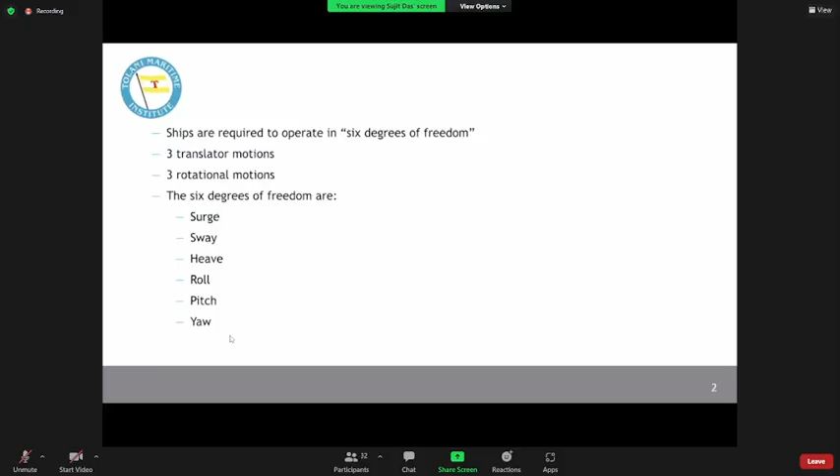Okay. Now let's understand this. The ship can possibly jump up and down in water. Am I right? Yes, sir. So that is what we call heaving. Okay. Similarly, let's not use pink, let's use blue. Similarly, we have another motion. This is also a translatory motion. Please understand these are along the axis. Translatory motions are the motions which happen along the axis, not about the axis.

So previously what we were seeing here, this is a translatory motion along the z-axis. That means the ship is jumping up and down kind of. And here the ship is having a motion along the x-axis that we call surge. So many times you will see people say the ship is surging ahead instead of saying the ship is moving ahead. That is because this degree of motion of the ship, along the length of the ship, is called surging.

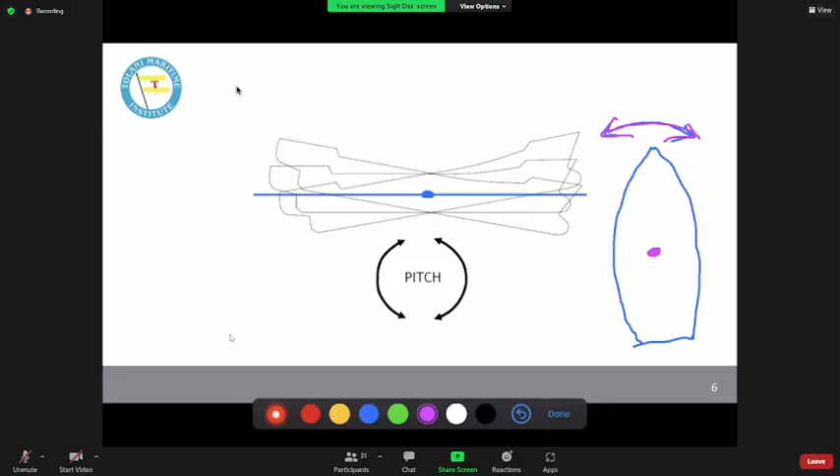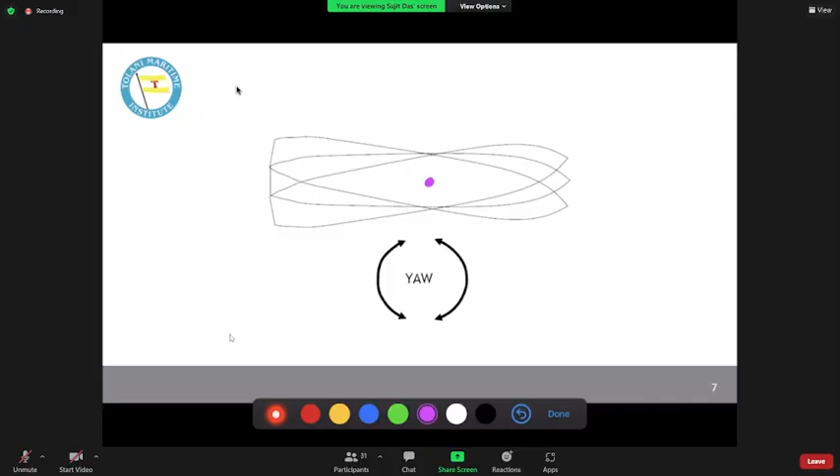Similarly, this is yaw. This is the motion about the z-axis which passes through this. This is the plan view of the ship. And finally we have the roll. This term you must have heard, come across, most widely used. Now, rolling is about which axis? Tell me. X. Yes, very good. This is the x-axis, the length of the ship. When it is happening about that, we call it rolling.

These are the three rotational degrees of motion, and earlier what we saw were the three translatory degrees of motion. Why we learned about this is because many a times, purely because of these degrees of motion, there can be certain forces acting on the ship's structure. So we need to know in what manner the ship is going to behave in the environment for which we are making it, and what are the different types of forces or situations that the ship may experience when we put it in that particular environment.

So let's move on to different types of stresses. This is a diagrammatic representation of what we just saw. Do you have any questions on this, or should I move?

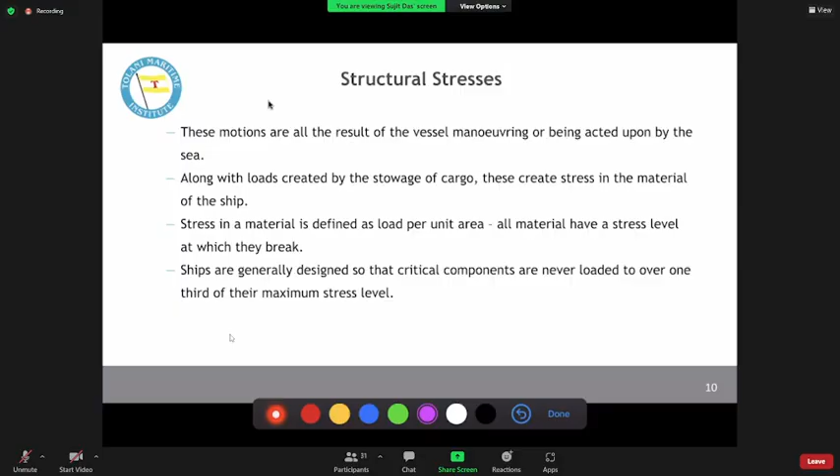Now, coming to different types of stresses on the structure of the ship. These stresses that happen on the structure of the ship, very often we can classify them into a number of categories. Broadly, we can classify them into local loads and global loads. Let me give you an example of local and global load.

Suppose I have a vessel. In the vessel, I have compartments. Suppose I'm carrying iron ore in the vessel, so I have iron ore here. Purely because of the mass of this cargo, this particular structure or deck will be under some stresses, right? Are you getting my point? Yes, sir. That is a local load.

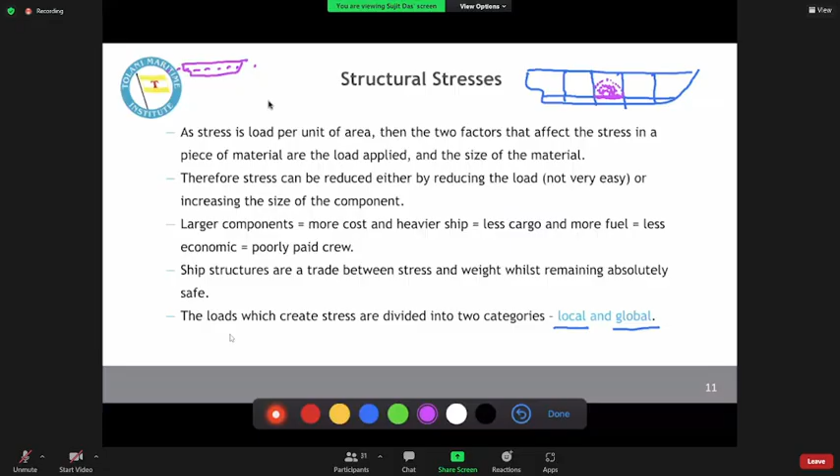Now imagine our ship was moving happily in calm water, and suddenly, because of the waves, or maybe because of improper loading of the ship, if I have cargo here and I have cargo here, because of improper distribution of cargo weights, our ship may try to bend in this manner.

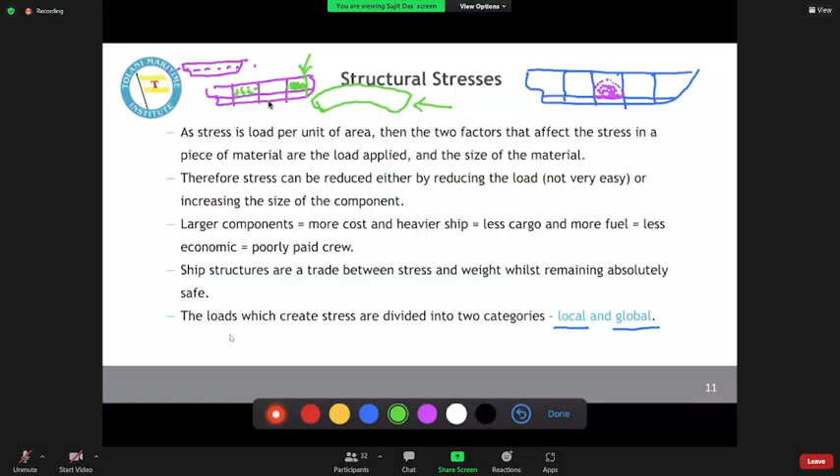Now, this example gives us a view of having a local load in that particular region, and because of that local load, the ship is experiencing a global load. Is it clear? Yes or no? Yes, sir.

Now, these local loads can be because of a number of factors. It may be because of fluid pressures, like cargo, or different fluids in the tanks, or it may be because of heavy machinery. Heavy machinery can be cranes, or in the case of defense vessels, gun mounts, missile mounts, all these things. Basically, any abnormal amount of weight concentrated in a smaller region becomes a local load.

We will understand later what we do in this case, because the contact area matters a lot. Whenever we talk about a material, we say it will be capable of taking this much kilonewton of force per meter square, isn't it? This is how we define how much pressure it can take. Okay, we have a chat.

In terms of a merchant ship, what can be a local load? It can be cranes. In the case of oil tankers, you will have hose handling cranes. I will show you those things. On almost every ship, we have cranes or davits. Now they are local loads.

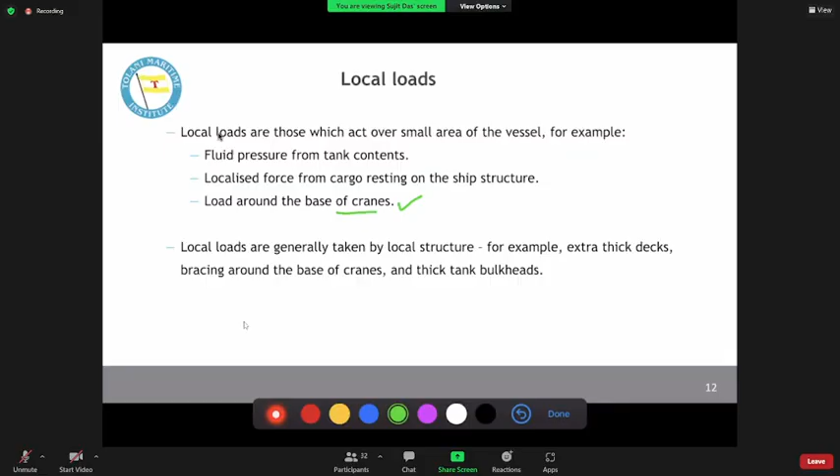Maybe we will try to thicken the plating of steel under that crane, or maybe we will want to add an additional steel plate under that crane foundation or something. We will slowly build up our pace and we will understand those things. These are examples of local loads. Now, one more local load is panting.

Panting means, let me explain it this manner. This is the bow of the vessel. Now, the bow of the vessel is subjected to two loads. These waves, whenever there is a crest, the crest kind of hits a portion of the shell of the ship, and next when we have a trough, that portion is not under a stress.

What I am trying to say is the shell plating of the ship will kind of move in an in and out manner because of the crest hitting it, or a larger wave hitting it. It may try to move inward, and when that force is taken out, it will try to normalize itself by moving slightly outward. Are you getting what I'm trying to say? No, sir.

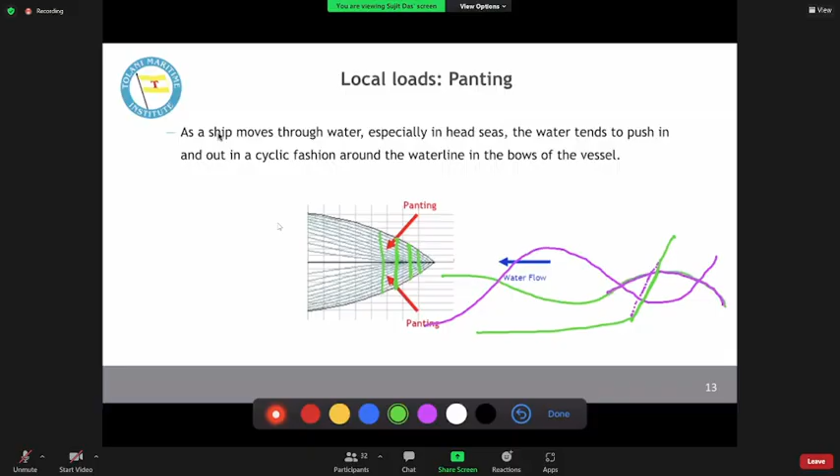Okay, so I will move a little fast now, because we need to complete quite a few things. The third one is grounding or dry docking. When you dry dock a ship, dry dock means, just say you have a car, you take it to your showroom for servicing. Similarly, a ship has to be taken for servicing, for different works to be carried out on it, and that we call a dry dock.

In a dry dock, we take the ship inside the dry dock, and then we start pumping out the water. As the water is pumped out, the vessel will slowly move down until it sits on these blocks. These blocks are called keel blocks. We will come to that slowly. But why is this portion moving down? The reason is in an empty ship, the aft portion is heavier than the forward portion, because in the aft portion we have the main engine and all the associated propulsion equipment.

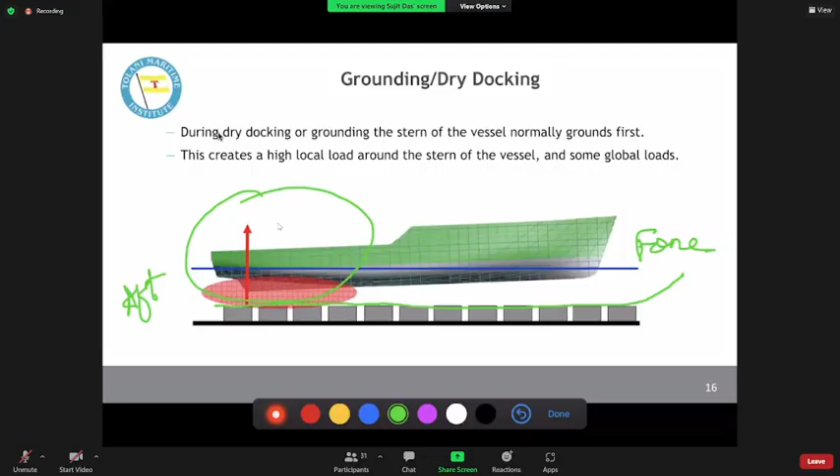Yes, this is the other type. This is called vibrational loads. These vibrational loads are mostly because of the equipment when it is moving. You must have seen in your houses you will have those water pumps running, right? When that water pump runs, it will be vibrating quite a lot. Am I right? Yes, sir. Now, if you put your hand on that, or keep a paper and on the paper keep some grains, they will shake and fall down.

Now, you also must have read about something called resonance. Do you know what resonance is? Matlab, there are two bodies close by, and if both bodies' vibration frequencies match, then the total can skyrocket, and the structures may fail. Have you ever heard of it? Resonance? Yes, so the amplitude might increase.

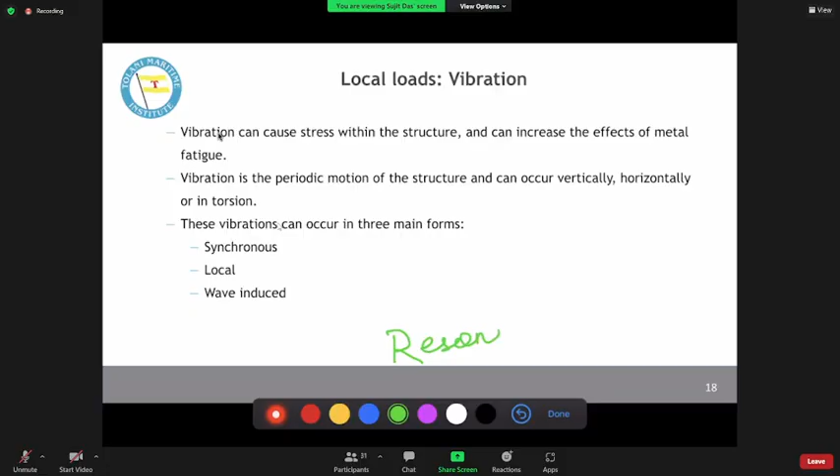Exactly, yes. So because of this, just a minute, I'm getting a call from college.

Yes. So there are these vibrational loads also. Now, these vibrational loads are not that easy to say that against this, we can take this kind of a precaution. But one very common practice of dealing with vibrational loads is using rubber pads. Matlab, if you put vibration against a rigid body, that may fracture. But if you put vibration against a rubber mat or something which is slightly able to take those vibrations, then that is a good practice. Okay, so that is what we do, and we will see that in a little more detail later.

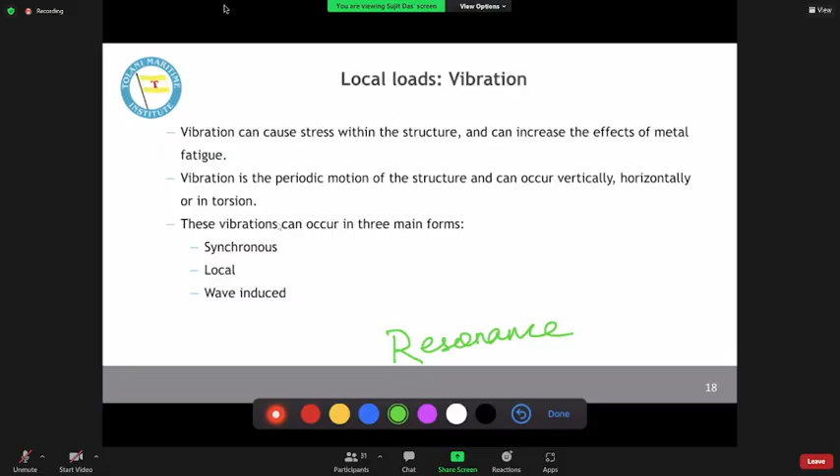Now coming to global loads, this is where the real thing happens. Okay, first thing, one type of global load is hydrostatic pressure. This hydrostatic pressure means, you must be knowing that the deeper you go into water, the water pressure increases. Am I right? Yes, sir.

So in the picture, what I have tried to show is a hull of the ship, and the red arrows are the hydrostatic pressures acting on the hull of the ship. And the dotted lines represent the manner in which these forces are trying to distort the hull of the ship. Okay. Now, these forces will obviously be more prominent on the bottom shell of the ship because it is at a greater depth compared to these portions. Am I right? Yes, sir.

So in this case, because we have the hull like this and it is bending in this manner, maybe we will try to put some plating in this manner. If we put it, maybe it will try to resist this deformation or distortion from the forces. Don't you think we can do something like that? Yes, sir. So we will see in more detail later how such a structure will be added, and if we add a structure like this, how do we support it, how do we fix it, how do we strengthen that structure. We will see a little later, maybe next week.

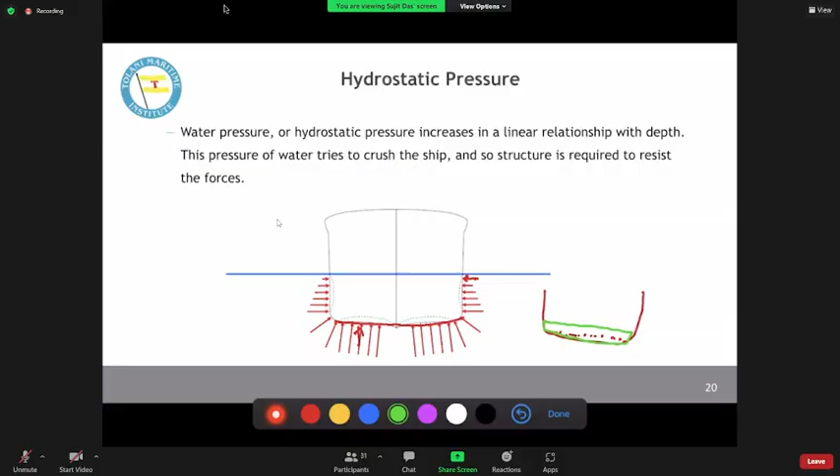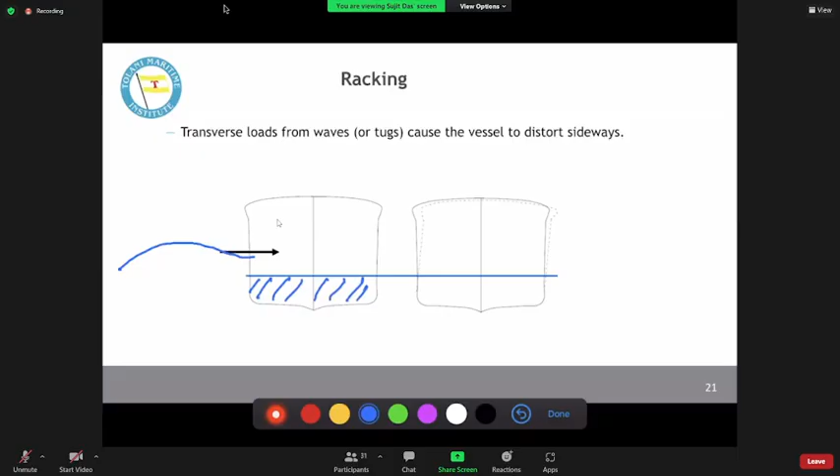So the second thing is racking. Racking means, think of it, the ship was stable in calm sea. Suddenly, a huge wave came and hit the ship. Now, because of that, because we have some portion of the ship inside the water, here the behavior is because of the fluid. Try to understand. On land, if I have a box and someone hits it, maybe the box will just topple over. It will just fall, isn't it?

Yes, sir. When this portion is in water, water is a viscous medium. So water has its own resistance to motion. In this case, the resistance to motion is only inertia and friction. That's it. In this case, it is the friction, the inertia, plus the viscosity of water which is resisting the motion of that ship.

When a wave hits, this side shell will try to move in this manner, but a more dangerous effect will happen with the deck, because the deck will try to slide off from its position. So, in short, what this phenomenon tells us is we need to provide special attention to secure the deck with the side shell. Am I right? Is this understandable? Yes, sir.

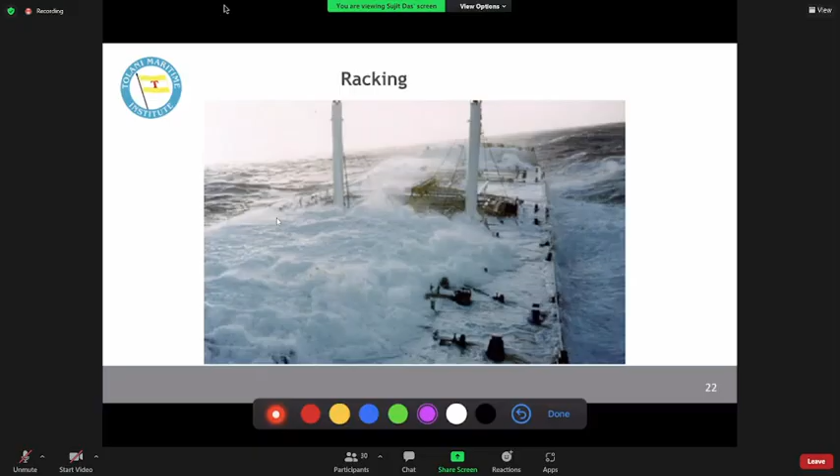Okay. Now, come to torsion forces. Torsion forces are slightly difficult to explain in 2D, but still, how it happens is, imagine, how to say this? Okay, let's see this. Suppose I have a speed breaker here on the road. Imagine, on the road we all are very angry at speed breakers because they slow us down, and sometimes you'll find quite a few speed breakers.

Now, you must be aware that there are two or three different types of people in the way they approach these speed breakers. Some people are those hero kinds who don't even slow down. They will come, they will kind of stand on their bike, they will jump and they will go. Have you seen that? Yes, sir. Some people will slow down and they will go on the speed breaker.

There is a third type of people who don't follow either of these rules. The road is like this, but they will not go like that. Instead, they will take a diagonal way. They will kind of slowly glide onto it and they will go. Have you noticed that? Have you tried that? Yes, sir. Now, when this kind of a thing happens, the front part of the bike has covered the speed breaker, and the back side of the bike is still behind.

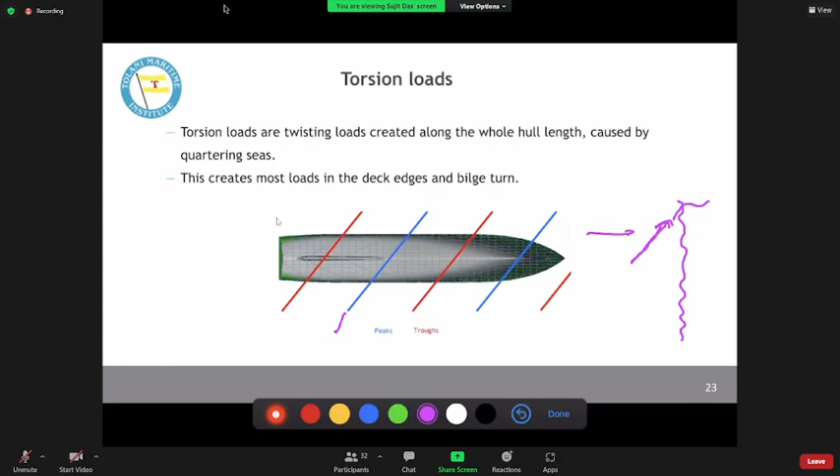Okay. I think we will stop here. Hogging and sagging we will see a little later, because I need to take the attendance and we don't have the attendance data. Okay. We will stop here. And let me just note down that in NS2 we will be starting with hogging and sagging. Okay, so this is where we stop.